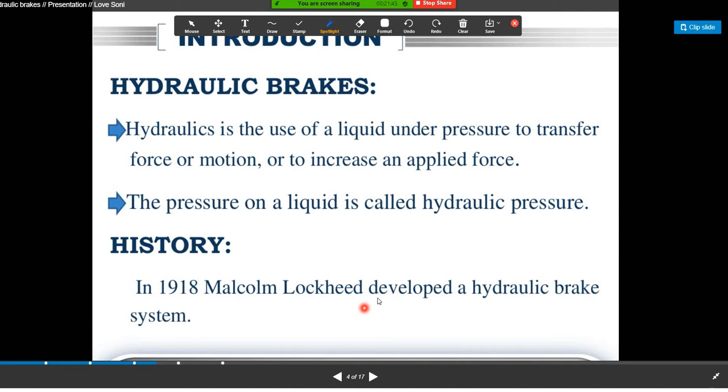In 1918, Malcolm Lockheed developed a hydraulic brake system. We already discussed that there are different types of brakes: mechanical brakes, hydraulic brakes, and power brakes. Today we talk about the hydraulic braking system.

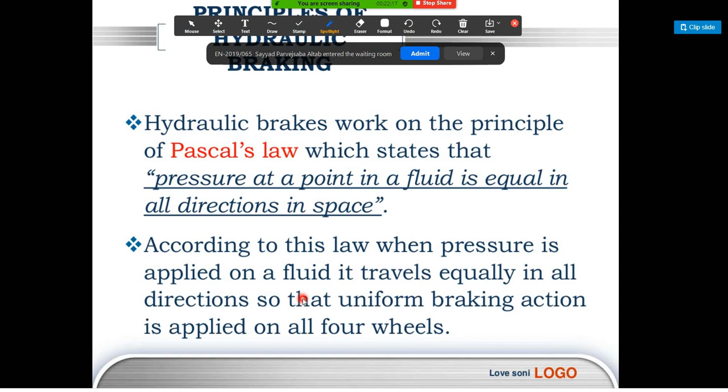The hydraulic brake works on the principle of Pascal's law, which states that pressure applied to a fluid in a closed container is transmitted with equal intensity through the liquid at right angles to the surface of the container. So the pressure at a point in a fluid is equal in all directions in a space.

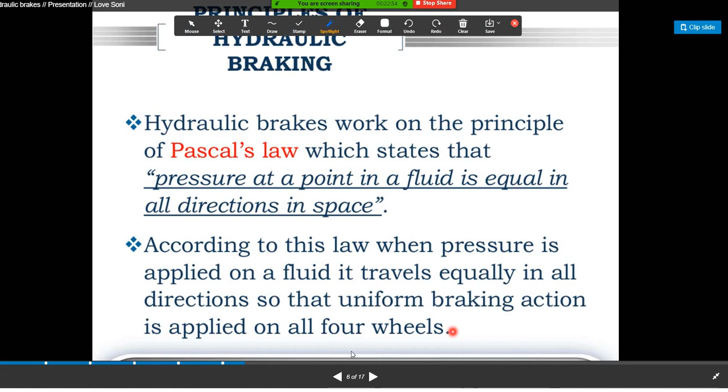According to this law, when pressure is applied on a fluid, it travels equally in all directions, so that uniform braking action is applied in all four wheels. Okay, so you can see here the construction.

This is the pedal. This is called the master cylinder, and it's the heart of the hydraulic system. The master cylinder plays a very important role, and it contains a special fluid made from either glycerin or alcohol, called hydraulic fluid.

This is the pipeline to the other wheels, the hydraulic piping system. This is called the wheel cylinder. This is the return spring, and this is a brake shoe. This is one brake shoe, this is another brake shoe. It is tied with a hinge.

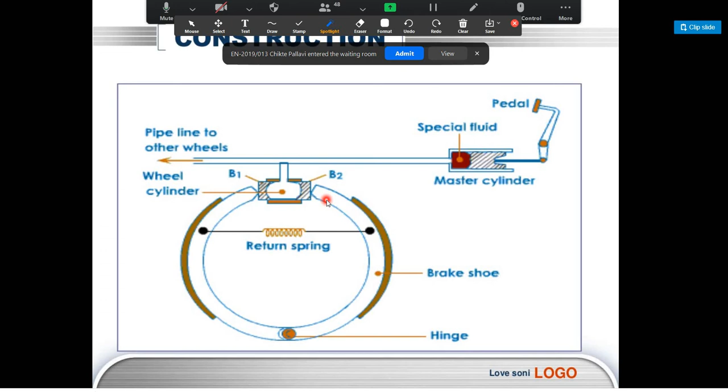This is a fixed type, but this portion moves the brake fluid, which is usually a mixture of glycerin and alcohol, or castor oil and denatured alcohol, filled in the master cylinder.

When the pedal is depressed, the piston of the master cylinder is forced into the cylinder, and the entire system turns into a pressure system. It applies force on the liquid, turning the hydraulic fluid into a pressure system immediately, and high pressure oil comes into the wheel cylinder.

So the wheel cylinder slides outward, which in turn moves the brake shoes to stop the rotating drum. You can see the wheel cylinder moves outward, and the shoe slides and tightens against the rotating drum, moving the brake shoes to stop it.

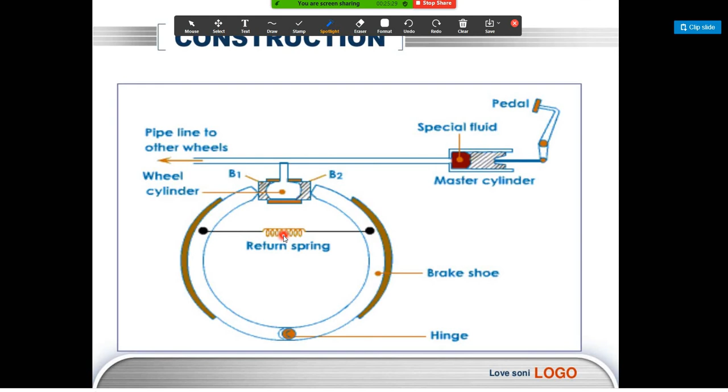When the pedal is released, the return spring of the master cylinder moves the piston back to the original position, causing a sudden pressure drop in the line, and the retraction spring brings the brake shoe back to its original position.

So when we release the pressure and force on the pedal, the piston moves to its original position, and the high pressure liquid returns back to the master cylinder. The pressure created in the wheel cylinder is decreased, so the brake shoes come to their original position and it removes the braking action on the rotating drum.

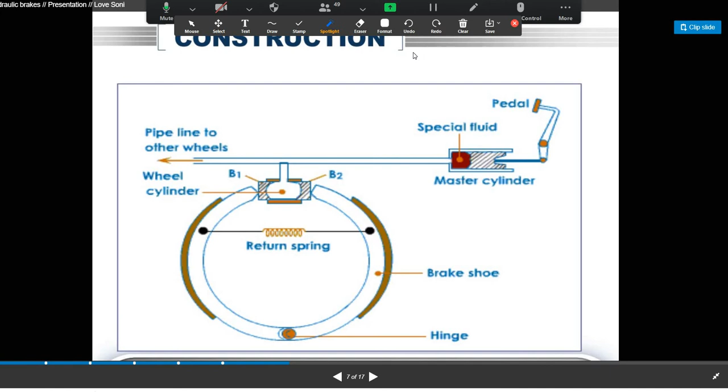The master cylinder is the heart of the brake hydraulic system, as I already told you. It converts the force exerted on the brake pedal into hydraulic pressure to apply the brake.

Depressing the brake pedal moves a push rod in the master cylinder. Mounted on the push rod is a pair of pistons, primary and secondary, in tandem, one after the other, forcing against the fluid in the master cylinder bore.

The master cylinder is shaped like a spool, and when the brake pedal is in released position, the space around the piston is full of fluid which enters the intake port. The pressure created displaces the fluid through the various brake circuit lines to each wheel and applies the brakes. Since the brake fluid is incompressible, it acts like a liquid linkage between the master cylinder piston and the calipers and wheel cylinder.

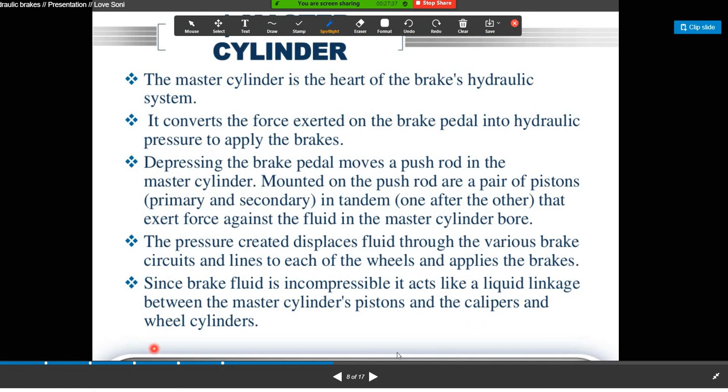So the space around the piston is full of fluid which enters the intake port. A rubber cup is at the front end of the piston, and a washer is provided on the rear side. The rubber cup on the front side is known as the primary cup.

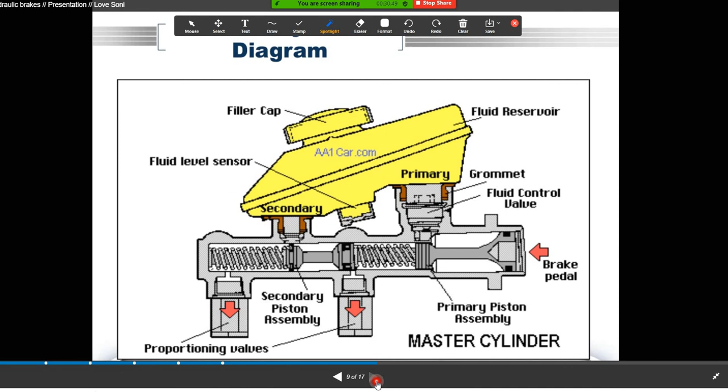So, a wheel cylinder is a component of the brake system. It is located in each wheel, usually above the shoe.

Its job is to exert force onto the shoe so they can contact the drum and stop the vehicle using friction.

The movement of the piston is transferred to the brake shoe through the actuating pin, and the cups are designed to hold the pressure without any leakage, while the spring keeps the pressure in the line.

Rubber boots on both sides of the wheel cylinder are mounted to prevent dust from entering the system.

A bleeding valve is also connected, which helps in pumping out air if it enters the system.

The wheel cylinder assembly is directly bolted to the brake backing plate, and it is responsible for exerting force onto the shoe so they can contact the drum and stop the vehicle with friction.

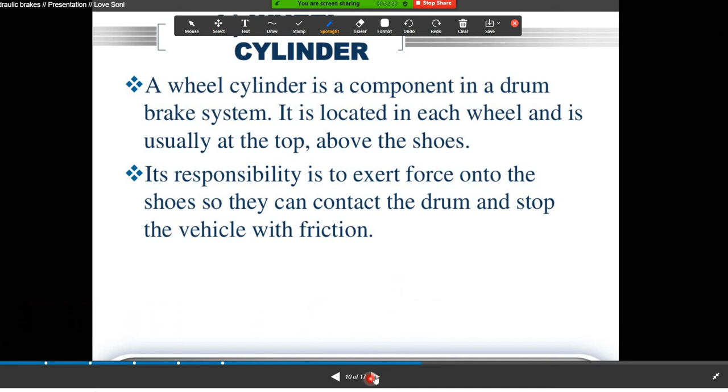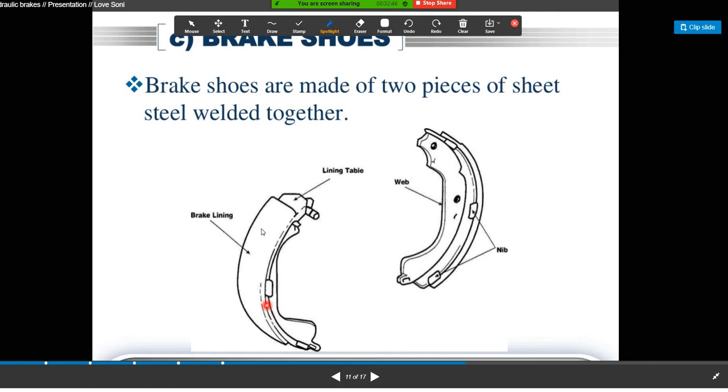This is called the lining table, or the brake lining. It is made from frictional material containing asbestos.

It is generally made of a special type of cast iron, and it is positioned very close to the brake shoe without actually touching it, and rotates with the wheel and axle.

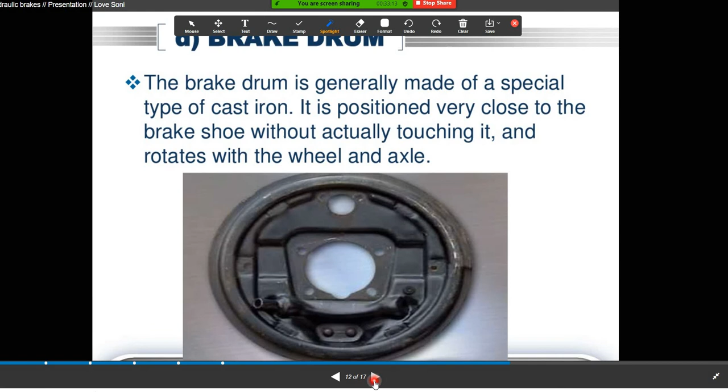Brake fluid is used to transfer force into pressure because liquids are incompressible.

Since oil damages the rubber seals and hoses in the braking system, brake fluids are not petroleum based, and most brake fluids used today are...

glycol ether based, but mineral oil and silicone based fluids, which we call DOT 5, are also available, and it is a special type of fluid.

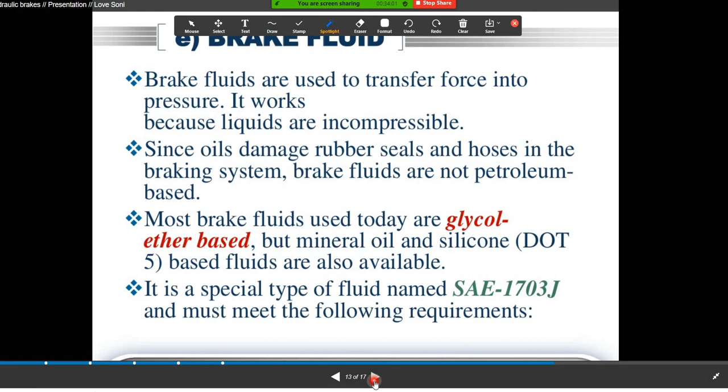SAE means Society of Automotive Engineers, standard 1703J, and it must meet the following requirements.

When the brake pedal is pressed, what happens? The piston moves and creates pressure on the hydraulic fluid.

That high pressure oil enters the wheel cylinder, and the two cups move in opposite directions, so the brake shoes expand.

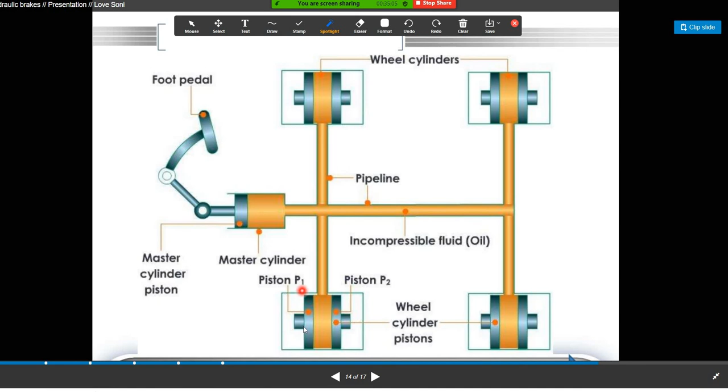The shoes are brought into contact with the surface of the rotating drum, and it stops or slows down the rotation of the drum. You can see piston 1 and piston 2 here.

So what are the advantages and disadvantages of hydraulic brakes? Advantage: equal braking action on all wheels. We can apply equal braking to all four wheels at a time.

It increases the braking force, is simple in construction, has a low wear rate of the braking lining, provides flexibility of the brake lining, and increases the mechanical advantage also.

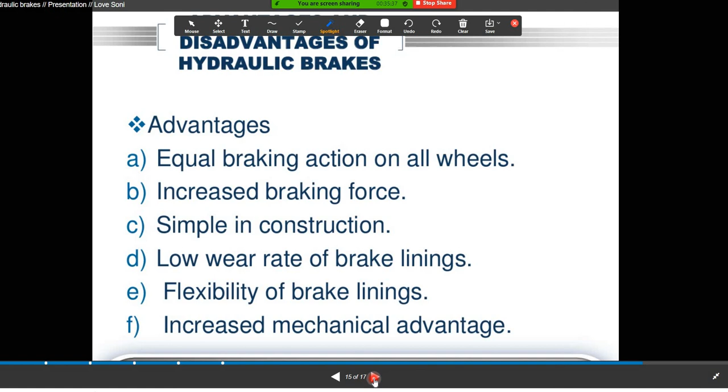So what are the disadvantages of this braking system? First, the whole braking system fails due to leakage of fluid from the brake line. Second, the presence of air inside the tubing ruins the whole system.